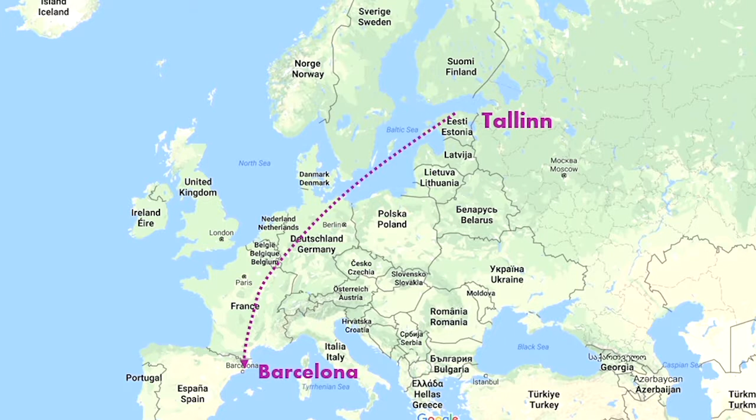So as said, I come from Tallinn, and almost 10 years ago, I studied 1 year in Barcelona. In Tallinn, I have a Master of Science degree in civil engineering, specializing in HVAC design. Though during those 5 to 6 years, I realized that design is not really what I would like to work with, so it's more energy.

Therefore, after 1 year in Barcelona, I went back to Tallinn, and then I went to Gothenburg. There I wrote my master's thesis in thermal energy storage in a company. I did an internship, and then I stayed. I learned Swedish, so now I work as a sustainable building consultant for 7 years.

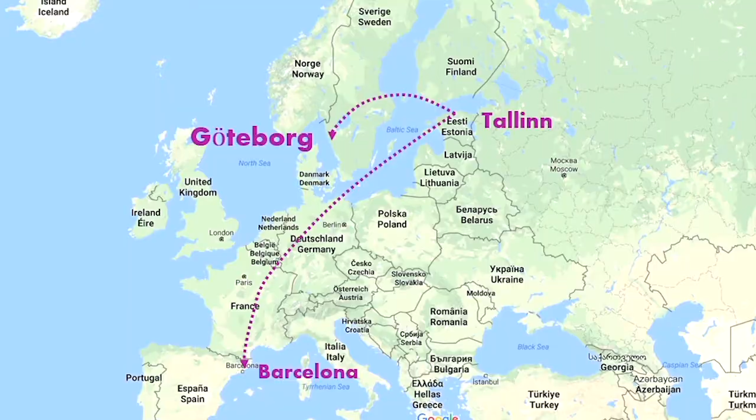5 years I have worked with simulations. A lot of simulations, mostly with IDA, as Alice will talk about later. A lot of daylight, indoor climate, energy, and so on. Yes, and there was the slide for that.

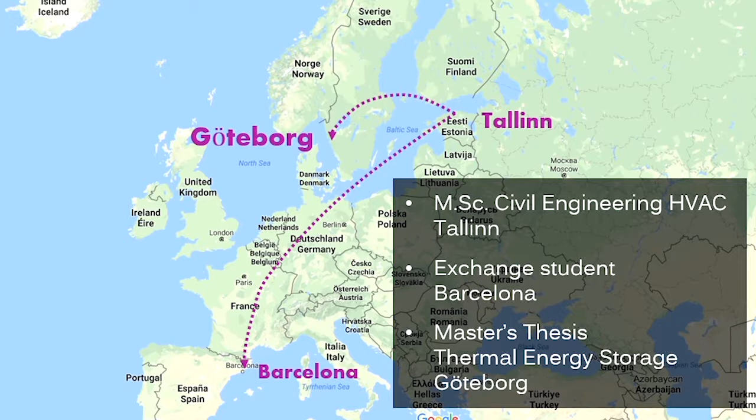Right now, for 5 years I worked in a company called Bengt Dahlgren. It's an HVAC design company, and today, for 2 years, I work in ÅF. And here, a bit of a presentation.

What's that? This is a Swedish Å, as you see there - it's an A with a ring, pronounced O, so ÅF. It's one of the biggest consultancy companies in Sweden. The sales are 11 billion Swedish krona. We are 9,000 people worldwide, and we have 100 offices.

And our new motto is making future.

The organization, just for you to understand the possibilities in the company, is divided into 4 divisions. We work with industry, so that's mechanical engineering, for example Volvo. Everybody knows Volvo, right? It comes from Gothenburg, actually. Did you know that? So that's mechanical engineering. Then we have infrastructure, where I work - all buildings, roads, bridges, and so on.

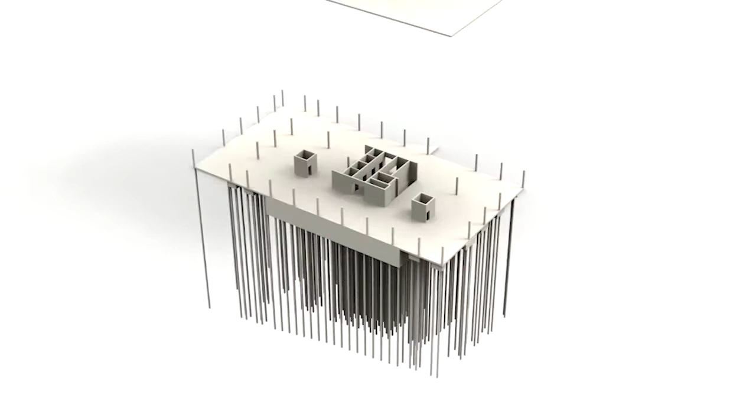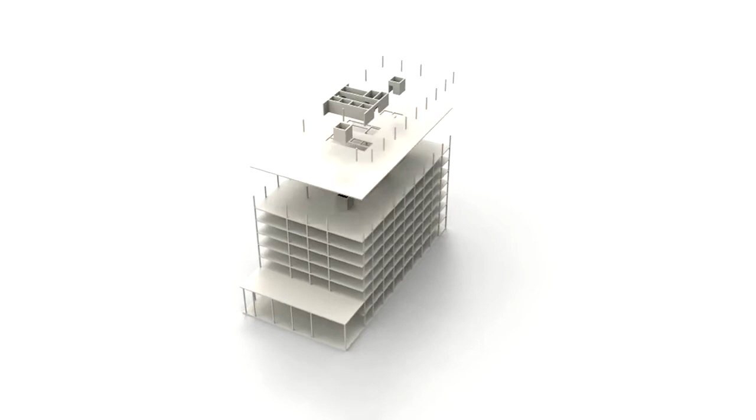Well, the sound is working good. This is buildings business area in Region West in Sweden. What kind of disciplines we have? This is our office building in Gothenburg.

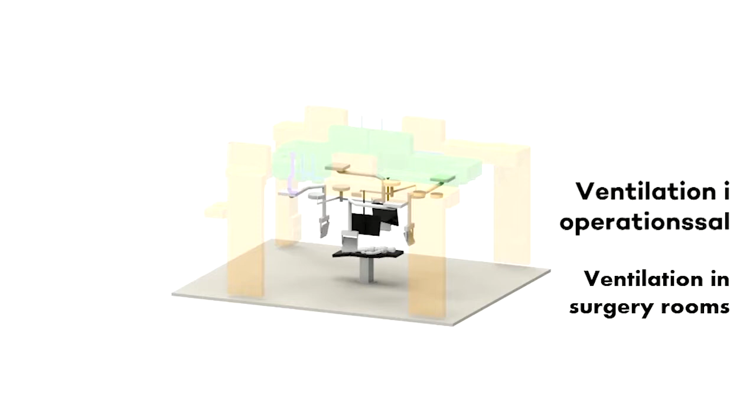Leading consultants in ventilation in surgery rooms. Does any of you work with that? As you noticed, there are a lot of ventilation channels and ducting in the walls.

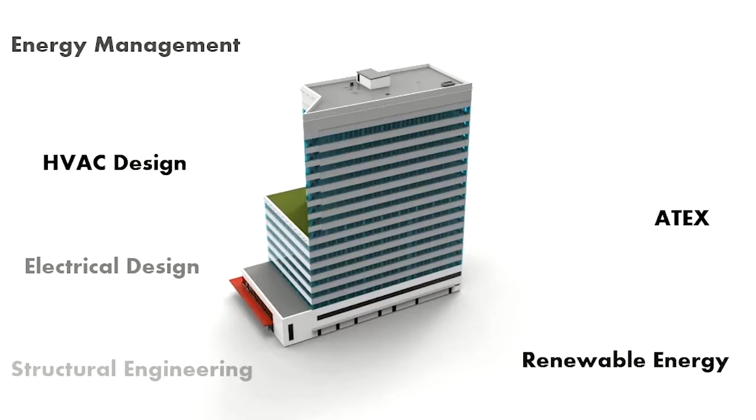And here is almost the last one, with no music. So this is all the disciplines we have in the office where I work. Of course, we work with all the other offices also, mostly in Sweden, because building design is a very local market, so it's not super international. So I work mostly in Gothenburg or in the Västra Götaland region.

What you notice maybe here, what is missing is the architect. Currently, we do have architects also in Stockholm. Let's see, in the future we might have them also in Gothenburg. That means that we can do the whole building design from one company. And that's something we're working on already. Some projects that we have, except the architect, in the region then.

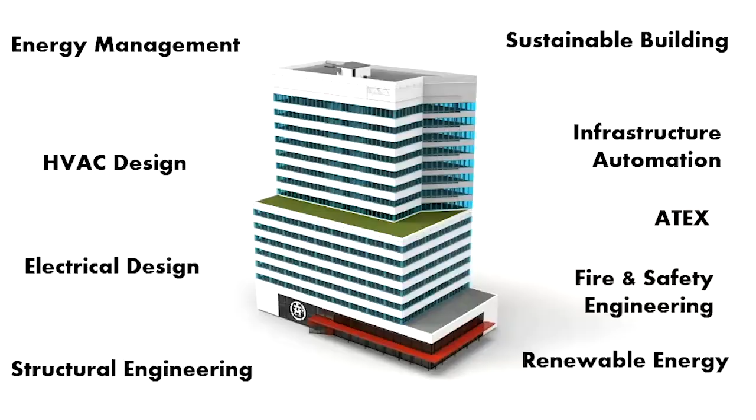And where I work, so now when you come to Gothenburg, you will recognize this building. You will know that is where I'm working. So today I'm working as a section manager or department manager for sustainable building. We are about 10 people working only with what I'm going to show you today.

Then also we have other colleagues in energy management that work with existing buildings, and so we have a lot of collaboration with them. And also we have an automation group that has energy focus and so on, and then the classical design principles, as I said. In sustainable building, we work almost only or mostly with new buildings. So also my presentation is about new buildings.

A lot of office buildings, hospitals, or commercial buildings. Some residential buildings also, because as you may have heard, in Sweden there is a big construction boom right now. We're building a lot. And also the reason is that there's a lack of residential buildings. So people have nowhere to live, basically. So that means there's a lot of jobs for us. So I'm going to show you some practical examples about sustainable building, what I mean with that.

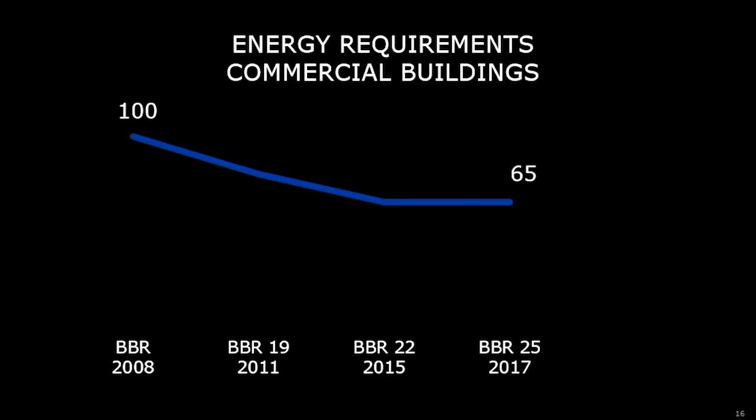And here, what are we talking about then? I have tried to illustrate it here. It is rather complicated because it's how we calculate, but just for you to get an idea of what numbers we are talking about. Because in the past half year, one year, we have got two new legislation versions. So they have changed everything. So in every project, the first question is not what building you're building, it's more like which legislation is applied to this project. Because then you know how to calculate it, or to work with the question.

What is BBR? It is Boverkets byggregler. That means the minimum requirements for how you build buildings. And their chapter 9 is for energy. These numbers here are in kilowatt hours per square meter per year. I haven't translated that. Square meter, how you say, heated floor area, as you know. Yeah, it's the same, more than 10 degrees.

Here is the version of the different legislations and when they came out. So basically, in 2008, you have achieved the requirements if you have maximum 100 kilowatt hours per square meter year.

But it's not total energy use, we are talking about the building's energy use, and this is where it becomes complicated. I'll try to make it short because Sweden is the only country that does this division. What I'm referring to is the energy used for heating, for the heat transmission loss you have with radiators, the energy used for cooling, for fans, for HVAC units - that's what you sum up, plus domestic hot water. Then it has to be maximum 100.

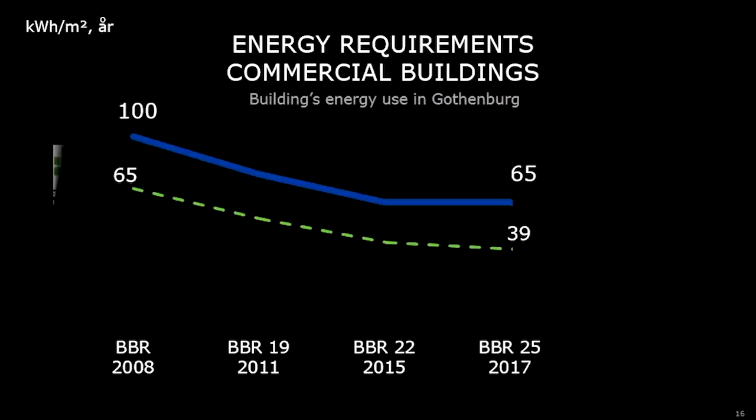This one, I will also mention this later on, but Miljöbyggnad is the environmental labeling system used in Sweden. Quite a simple system, but in order to have the highest level there, which is gold, you have to have 65% from the legislation's energy use. So there you see where it's needed to work even more with sustainable building.

And there is also a new version. So it's very confusing right now in the Swedish market because we have so many new versions at the same time with different projects. But yeah, that's why you need consultants to know about them.

And here, as you see, well, 2008, no problem - you can easily build a building with 65. But now, when you come to 2017, it's very low.

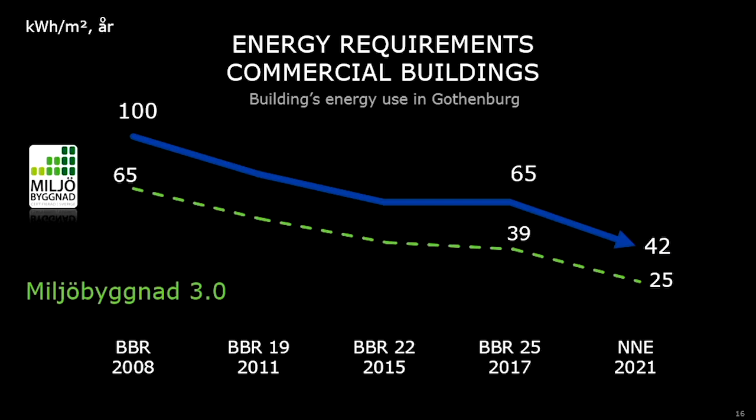And then in 2021, which is the nearly zero energy performance requirement you've heard about - no, this will be enforced in Sweden in 2021. Also a year when Gothenburg is celebrating 400 years, so if you want to come visit, there will be a lot happening. But the point here is that we are going to have even lower requirements.

So this is probably not the... I think that because in 2008 we talked about having lowered requirements from the legislation to have a green profile, but in 2021 I think everybody will work with this number, so there won't be any more requirement to achieve such low performance. But we don't know that yet, because it hasn't been enforced, because we're not there yet.

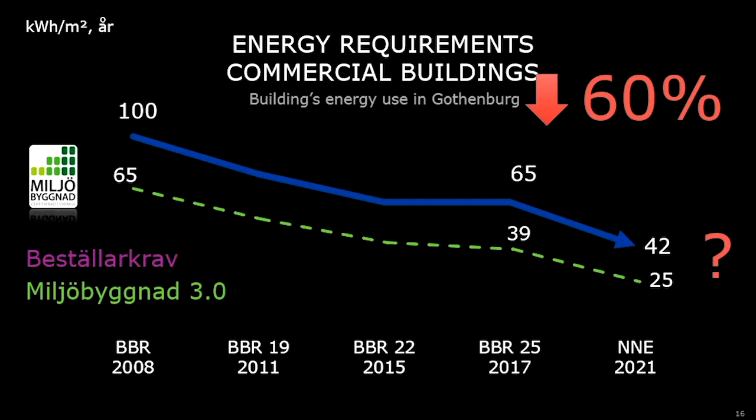This word here means the client's requirements, so the property owner's requirements, because in Sweden most of the biggest property owners have their own requirements for sustainable building, which is usually the same as the environmental labeling systems' requirements, or even tougher. So this was about the background. Any questions about this?

No? So 60% lower energy use - can you hear me? Because I think I'm doing this now. Yeah. So what does this mean in practice?

When I was preparing this presentation, I had a lot of pictures, and I was thinking, okay, but let's really talk in practice. So I chose one project that I'm working on right now, been working on it for 2 years, and just as an example, what we do there.

It's quite a special project because it's not every project - there's a lot of innovation there, the main focus. But it would still be a good example of what we can do.

Yes, this project is called Johanneberg Science Park 2. It's this one, the red building here. Why it's number 2? Because here we have number 1, Johanneberg Science Park 1. Johanneberg is an area in Gothenburg at the Chalmers University campus area.

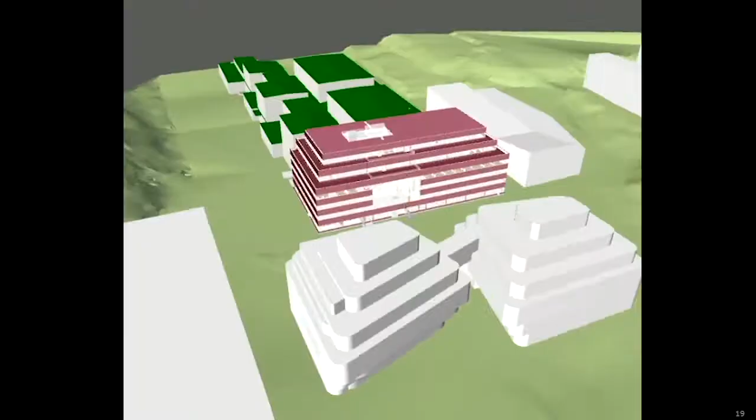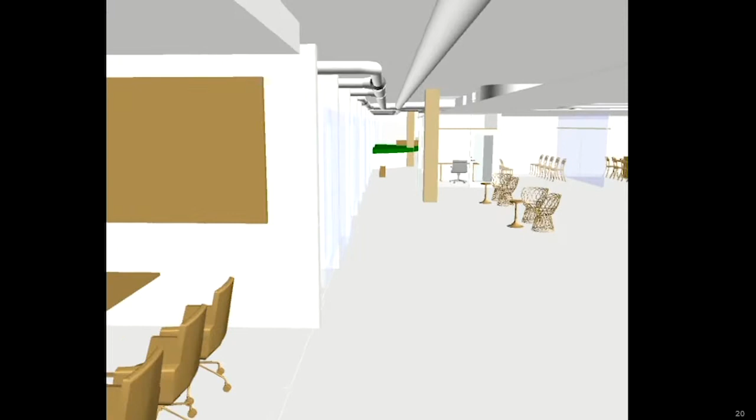Yeah? Oh, so I can take a break and show you some more videos. We were playing here just to visualize, because we are no architects, but to show the house. Okay, that was it. Some furniture. It's all about visualization right now. You have to show pictures.

For example, when you work with architects, you have to really show them. The text doesn't work. No one reads text anymore. So here we just try to show it, because we talk with our other colleagues in industry and in technology about this project and how could we do it in different ways. At ÅF, because we are the innovation partner, and they don't work with buildings, they don't know what I'm talking about. So you have to also show them, this is what we talk about.

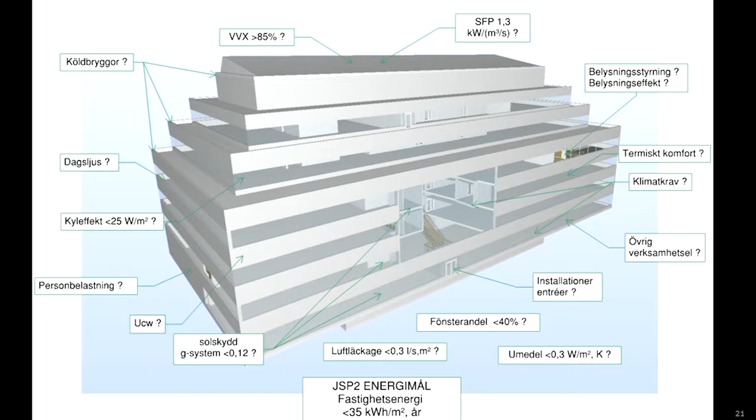Here we come to the most interesting part for you guys. This is the heat exchanger in the HVAC unit. So it has to be higher than 85% if it's rotating. That's also quite a normal requirement already. But it depends also how you then design the whole system. Because when we come to a specific fan power, 1.3, it's quite hard to achieve here. And that we haven't done for other reasons also.

But then all the time when we don't really achieve some requirements, then we have to motivate them. And it's all documented, and it was all signed by the property owner's technical group. So you can't really take your own decisions, we don't care, it didn't work. It's more, okay, did you really do everything you could to achieve that? Yes, we did, but since we have done these changes, we couldn't have exactly that number. But it will be good anyways. But still, to describe how the process works with the requirements.

I have more pictures on that building. Here I didn't mention this, but I will come back to that if we have time. It's for solar shading. Any questions so far on some numbers here? Yeah, I have a question. The U value 0.3, it's total for windows and the facade? Yes. It's total for the windows and the facade. So what is the U value for the windows? Do you know? Good question.

Yes, I know, because I work a lot with facades. So the U value for this project, including the frame, is 0.8. That means when we are building curtain wall profile, the glazing is 0.5. And that's super low. If you want to go lower than that, you have to change the argon to krypton, and that is not environmentally friendly. And the walls, thickness and the U value?

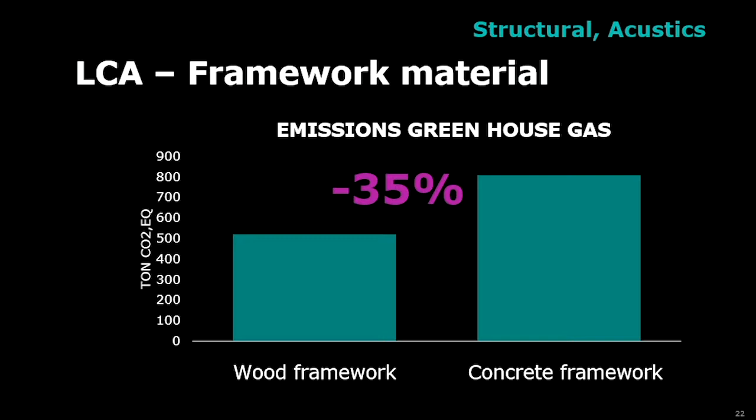Everybody's like, what? In wood? Are you kidding me? Office building? Why complicate your life? Well, because we are working with sustainable building. And that has also made new challenges for the structural engineer, for the acoustics engineer. And now we have also an innovation project in this project for acoustics, because it's much harder to achieve the acoustics requirements that we have from the environmental labeling system, which are higher than the legislation, between the floors and so on.

Because wood is a natural material, it moves and it's alive, let's say. But at the same time, it means that we learn new things and we find new technologies, which is quite amazing. But acoustics is not really my area. I work to make sure that we fulfill all the requirements.

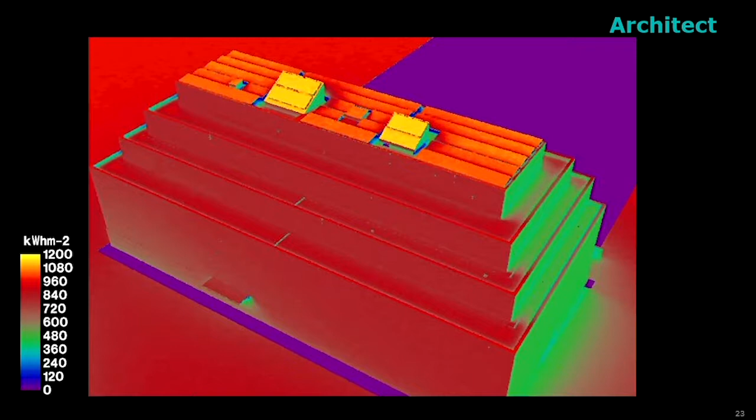This is quite a basic study for the solar radiation, kilowatt hours per square meter of outside surface per year. So just from the 3D model, take a picture and you see where they should put the solar cells. Here, of course, is the best, but the roof is quite good also. So we have solar cells on the roof, which is not really innovation. Most of the projects have that.

But we did also look into having them integrated into the facade, but that's not really cost effective because it doesn't give that much energy compared to the investment. And then, of course, you always work with the cost. We don't have an endless amount of money.

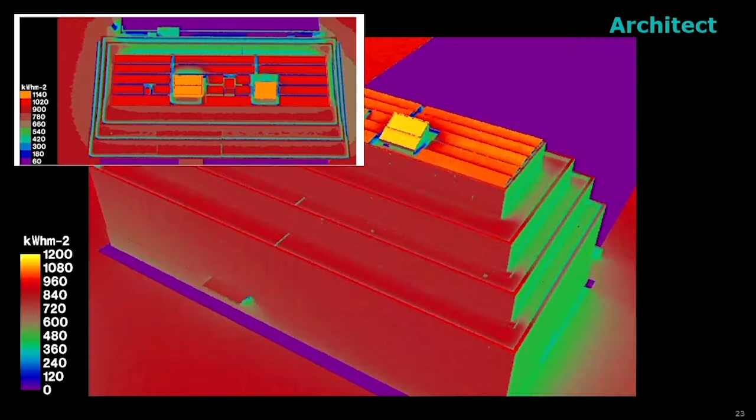And in this type of construction contract that we have, everybody is thinking about the cost. So you're open about the information with the property owner and the constructor. Like, okay, if we do this, can we minimize the cost? It's very interesting to work like that because normally, in the early stages of the design process, we don't talk so much about the cost of the actual systems that we build in.

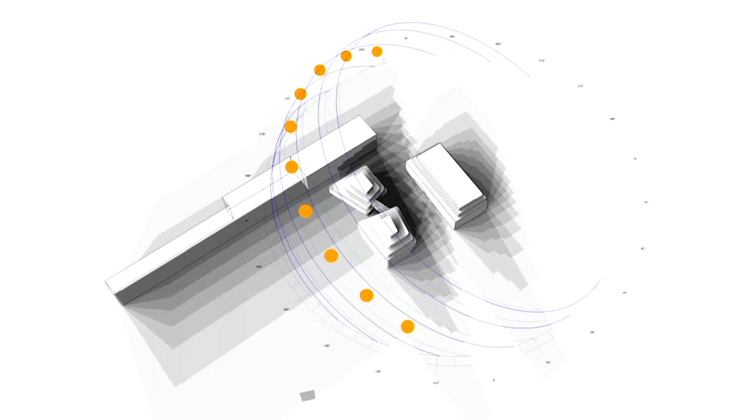Here we have looked at the shadows, just as an example, and we see the south facade doesn't have any shadow at all from the other building. Well, here those buildings were not in the model. That means that we will have a lot of daylight, but at the same time it will be very hot. And what do we do so that it wouldn't be hot? Here we didn't open any windows. The first picture was 36 degrees.

So this is a study. Normally it's like this, that you work with the question so you know the result. You say to the architect or to the client, we will have problems here. Then they're like, oh, are you sure? Okay, we can do a study about it. Just to prove what we have just said. So you do a study.

And I mentioned my colleagues in industry working with Volvo and vehicles; they do super amazing detailed CFD studies. This is very basic, but still quite hard for us to do, because we work with simulations of buildings, but not with that specific topic of how the air moves, what it depends on and why.

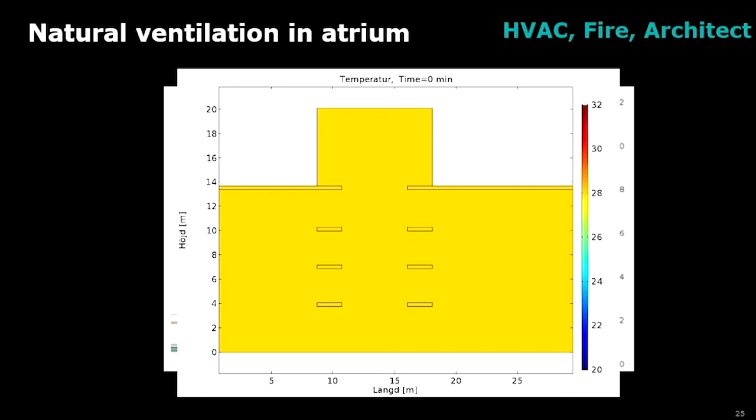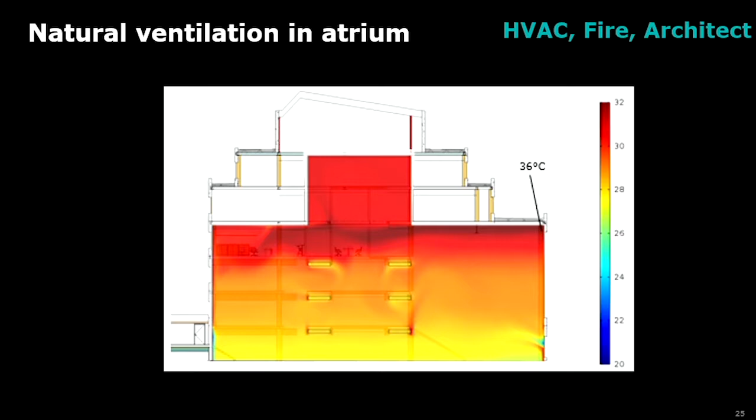So let me move back. The result here was that we will have 36 degrees here. The requirement is 25 degrees inside, maximum, for the cooling. The challenge here is that the atrium goes through 6 floors. This is the south facade, this is the north facade. In the beginning we had an atrium through the whole building, but no glass on the roof, glass only here. And then we checked that it will be very hot, so what do you do about it?

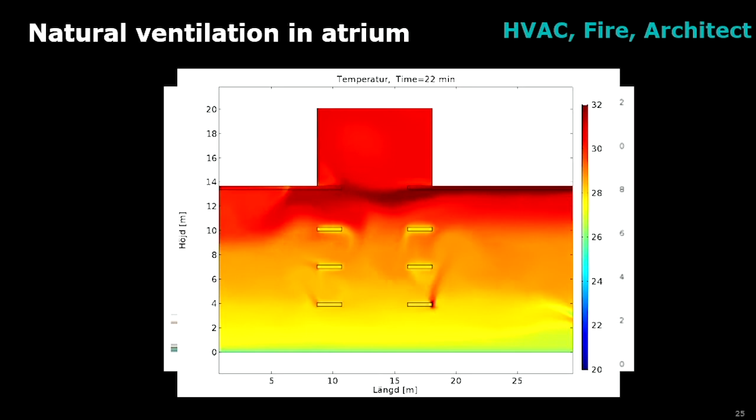Yeah, as you see in this picture. So these are the different floors, because people go here, they cross from one side to another. Then the project advances. We have new principles. We need to have more tenants, maybe. So we cut in half the atrium.

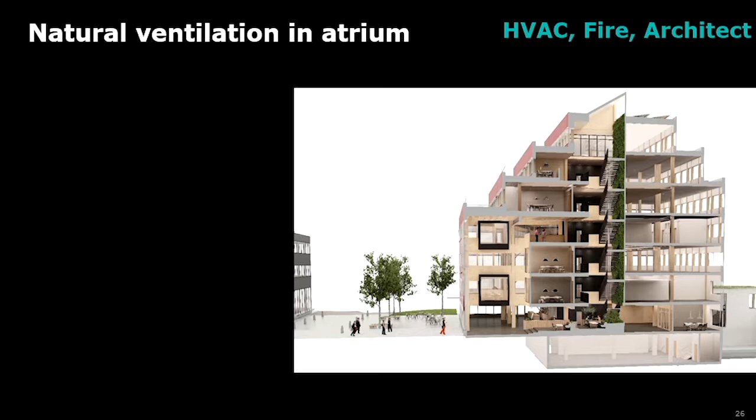It doesn't anymore go from south to north. Now it's flipped because this picture I couldn't print it. So anyway, it's from south to north. If it goes south to north, the heat comes in and then it goes out. No problem. And then we just checked that it wouldn't be too high velocity on the air with our basic simulations. And they cut it in half because here we will have more office space.

That means that all the heat that comes from exactly the same glazing area will now be in a much smaller space. We were like, okay, have you really thought this through? But we understand the reasons why we do that. So then we've done a similar calculation in another program, because we needed to. And this was the result: we will open here the facade, like windows or natural ventilation hatches here, and then up on the roof.

So just to ventilate it, because we can't put cooling beams there, because that will not go together with our energy performance requirements. And it's a combination of simulation to see how we think it works, but also a combination of experience, because with natural ventilation, I don't know how many of you work with that, today it's not so common, and I think there are not so many people who really know how it works, including me, but I have worked a lot with atriums.

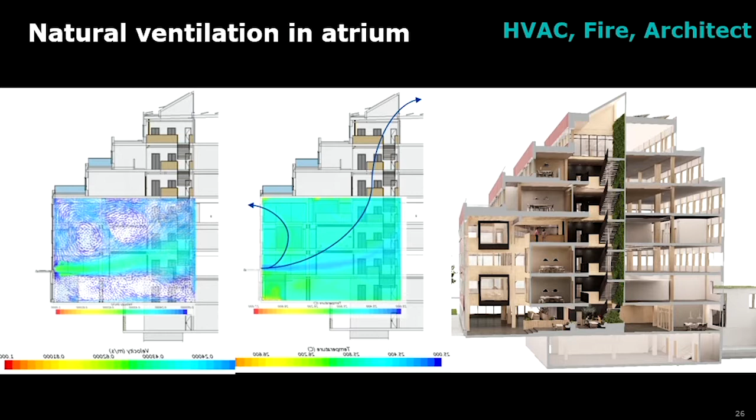So it's experience that you think this will work, and then you try to prove it with the simulation. But not only that, here we check the temperature and the velocity, and we saw that okay, we need to open it there also. We didn't want that if someone goes here, papers fly away. Well, I don't think that would happen, but still, to double check that.

But you can't just open windows and think everything will work. That's something I say to the architect now, because they don't like it: if you open the windows, you have more frame area and the aesthetics will be different. But here we have good architects and they understand that we need to do that. But it's not only about opening windows, it's a combination of many other aspects.

So here we have the solar shading solutions. In this project, we have MicroShade in the atrium facade. It's a 140 square meter atrium. MicroShade is a micro lamella developed in Denmark. Someone has maybe heard of it? No? It's a very small company, from the university, that has developed this kind of solar shading. It's quite complicated to calculate, so that's why it's complicated to apply in projects.

But since we think that we know everything, we say, yeah, this will work, this is the best solution. Why we chose that? Because it's a passive solution. It doesn't go up and down. It's in the atrium, and in the atrium you actually want daylight. So this is something you can still see through, compared to, for example, screen print, or something fixed on the facade, which wasn't an option for this project. The G value for that is very low.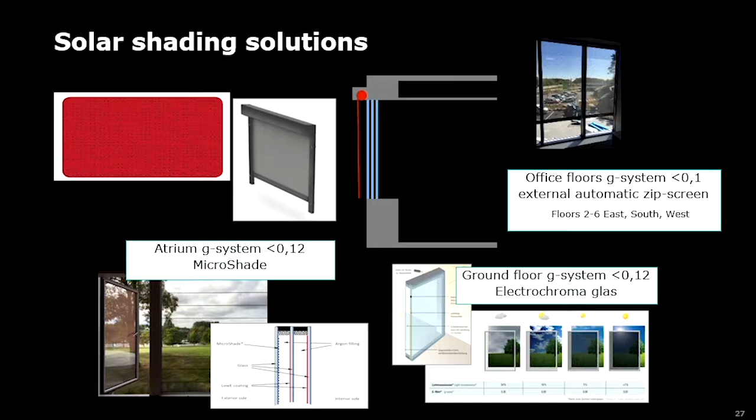It's the same, you skip that. We have done daylight analysis, so there will be an open office there, open landscape to call it, and here we just check the whole floor without any furniture.

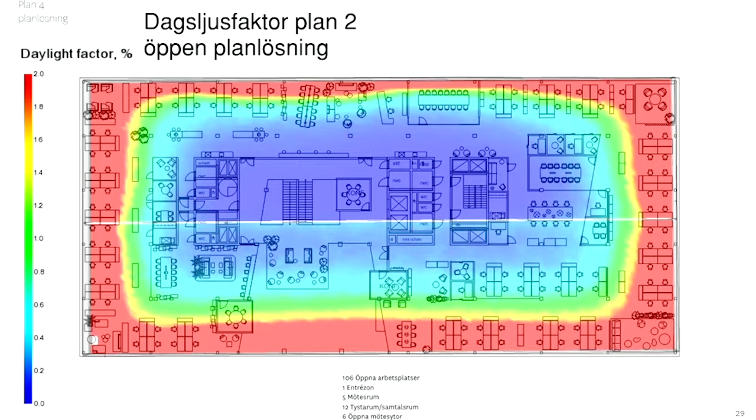It's quite simple in this project because you have the same window ribbon, so it's the same design principle or dimensions for the whole building. And then here we show, yes, here you can't really have offices that people work in because it's too dark, because you don't fulfill the requirements. As you see here, you have to have a daylight factor of 1.2% to get gold.

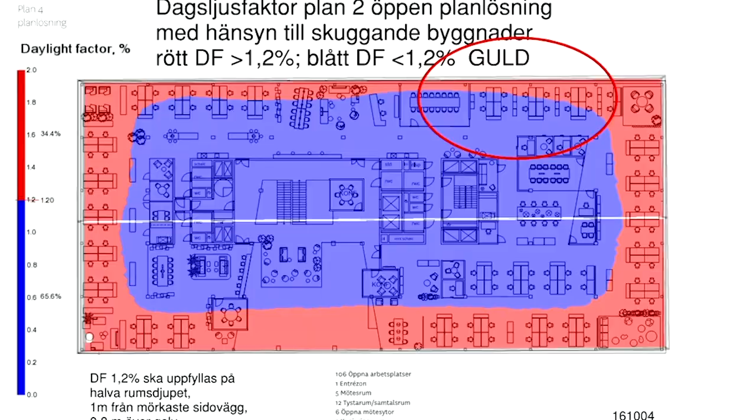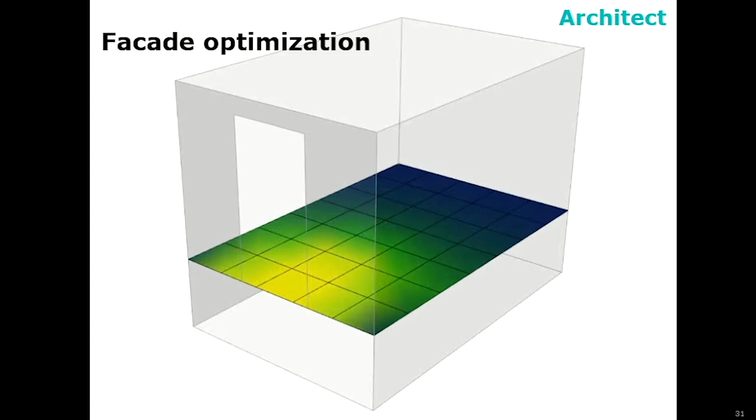I will not go more into detail time-wise on this, but we work with daylight. That's the point. A lot of different kinds of simulation programs to analyze the building. For example, this one is facade optimization. So as I mentioned, this is a regular office, 2.4 meters, 3.6 meters, single person office, cellkontor we call it in Sweden. And then you put here like, okay, I have to achieve daylight at 800 millimeters from the floor level. And I have to achieve that I don't have too much solar heat with that kind of glazing. And then it works, you push play and it calculates, this is how it will look.

So this is something we're working on to work more with architects in early stages, instead of doing like 100 different simulations back and forth, because daylight and solar heat calculation is not the same. Well, now it's the same program, but it's not really the same methodology or the same parameters, so you really need to remodel the model and then calculate it. So here it does this very fast in this program, but it's not as easy as it looks here. It takes some time to figure out.

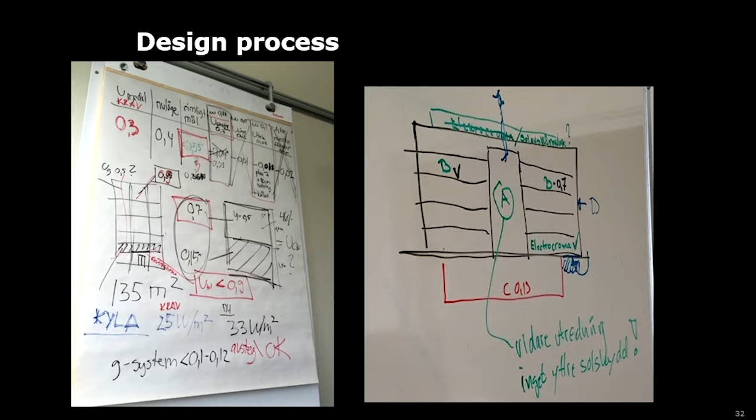This is an illustration of how we have in the project been talking about U values. Just a lot of brainstorming, sitting down, okay, now we have to do this with all the project group. And then we decide, okay, here we will have microshade, there we have zip screen, and here you see the glazing is 0.5, and then it's 0.7 for the total. So that's how we achieve it.

And this is a meeting that I'm leading with the project group because they really need to understand what we're doing. It's not only sending an email or giving them a document, like this is the number and do it. It's really that they will understand why they have to do it. So that's a challenge, but it's also what's fun about the work.

Time-wise, so conclusion on this project: we have variable air volume. Everybody was wondering that, for sure. I'm talking about daylight, but you were like, no, what's the HVAC system? So variable air volume with climate simulations we have done, indoor climate, I mean. Natural ventilation in the atrium, I call it. Then we have lighting with low installed power. Electrical engineering is quite simple when it comes to the sustainable building, it's more like when they measure the stuff that they do it very complicated. Lighting with daylight control, of course, because we have a lot of windows, so we should definitely have that control.

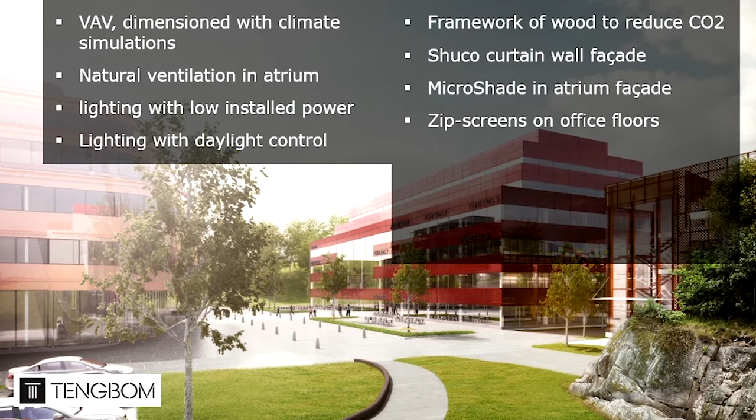Framework of wood to reduce CO2 that I mentioned before. Shuco curtain wall facade, microshade here in the atrium, zip screens on all these floors here. Electrochroma, well, that's not anymore, but we wanted to try different facades here. But due to cost and so on, we don't have it anymore. Window design for daylight, because it's the ribbon and also the height. At the last minute, we actually decreased the window size because we had problems fulfilling the U values. So the architect was not so happy, but they got something else, like they want to have a green roof. We will see if that will happen, but yeah, it's give and take.

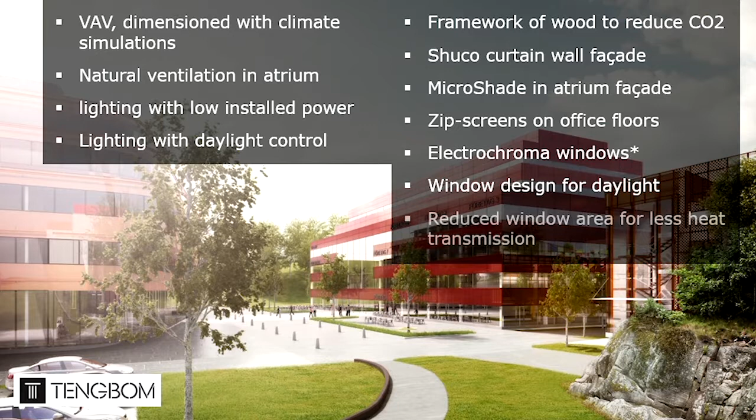Yeah, as I said, solar cells on the roof with batteries. Very shortly, yes, we will have - not Tesla batteries - but we will have batteries in this building for demand and production, to have them simultaneous. So it's another innovation project here, and that hasn't really been done so much in buildings, so we will see how it works.

Then also we have DC, direct current. So not AC, DC from the solar cells, because solar cells have DC, and we're not having the exchanger in between where you have losses. Then we want to have DC, for example, for the HVAC, for the fan. And then we have to call everyone: okay, do you have a fan that you will sign the warranty that it will work? So it's a lot to explain what we are trying to do here, which you normally don't do the same way. So it's another innovation project here.

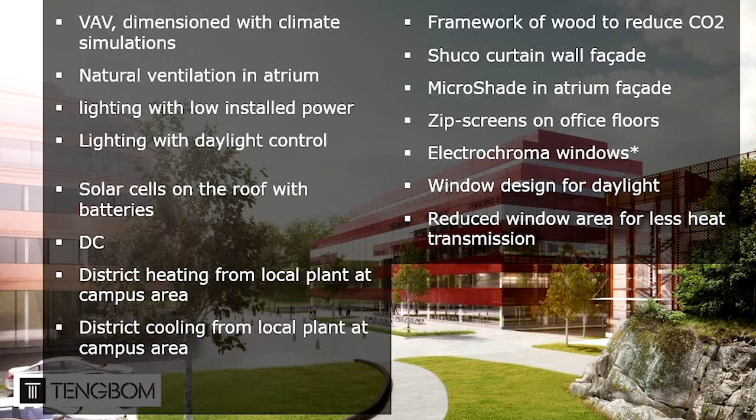But otherwise, in this campus here, they have their own district heating, the local plant, and then we have district cooling, because I thought you would want to know how we otherwise have the building. Because we didn't have enough space to have geothermal boreholes, for example. But we had that option also from the beginning. This other building has that. It has, say, 200 meters down boreholes, heat pumps.

And then, also very shortly, PCM energy stores, another innovation project that I'm very happy for, because this is my master's thesis. PCM is phase change materials, so salts or paraffins, that you can store the thermal energy in, and then you can reduce, in this case, cooling power when you have the peaks. We can talk more about that later. So as said, we have high energy performance requirements, high ambitions for sustainability, and we have Miljöbyggnad Gold.

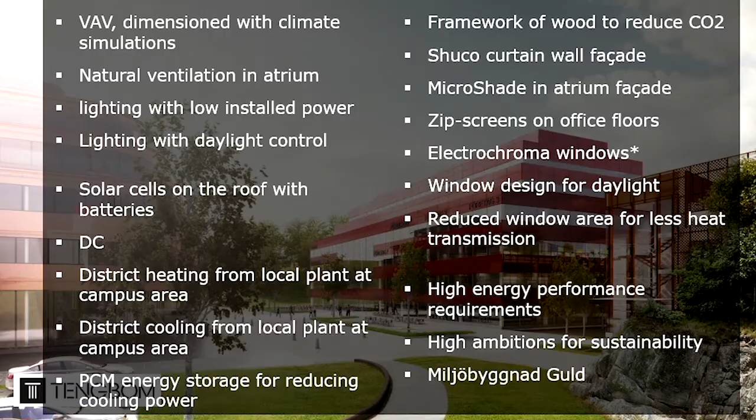Yes, I was just thinking, I will try to, because I have 5 minutes for me and 10 questions. Oh.

Then we have Living Building Challenge. That's the Canadian version, but we don't use that so much. There's a new one also called WELL, that is only for the indoor climate, that you work with together with LEED. So it's more like the soft parameters, like how do you feel in the building. But since we work so much with those labeling systems, it's already next level that you are thinking of an even broader perspective. So there's also City Lab, that is for the whole city area, or many buildings together, like how do you design them? And these are maintained or managed by Sweden Green Building Council.

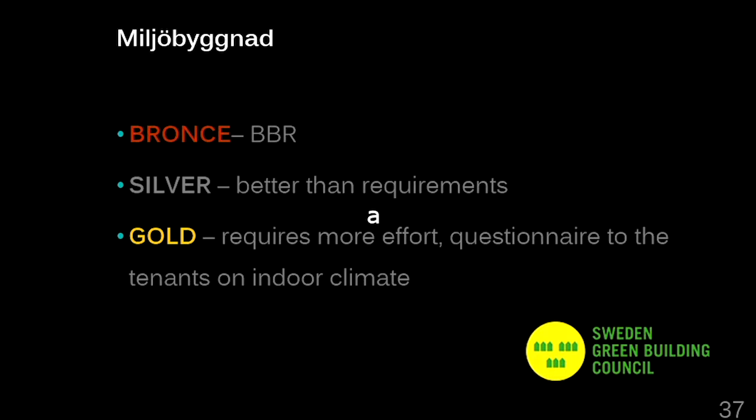Why do you work with the system then? In some projects you still want to do the quality check, because there's a third-party control of all the paperwork. So that's what I do: gather all this paperwork for all the different calculations or acoustics showing that we have fulfilled the requirements, and send them in. They will be controlled by a third party, and then you get the certification. Because for the legislation, no one will check that you actually did the job. Now we have the requirement of verification of the energy performance, but in my experience, no one from the government side has asked me whether I really fulfilled them.

Then we have silver, that is a bit better than bronze, and then we have gold, that requires more effort. And also in the end, you ask the tenants, do you like the indoor climate? Do you like the acoustics? And if they don't like it, then you don't get gold. So that's a bit why you work with that the whole project. Miljöbyggnad is divided in 3 different areas: energy, climate, and materials. Materials is like how you build the building, that it doesn't have chemicals that are not good for the environment.

So this is very short, because I want to come to this, because everybody is definitely wondering how we do this. I show you a lot of practical examples of how we work with sustainable building, but how do you actually make sure that you fulfill the requirements? How?

Yes, you hire me. No. Well, yes.

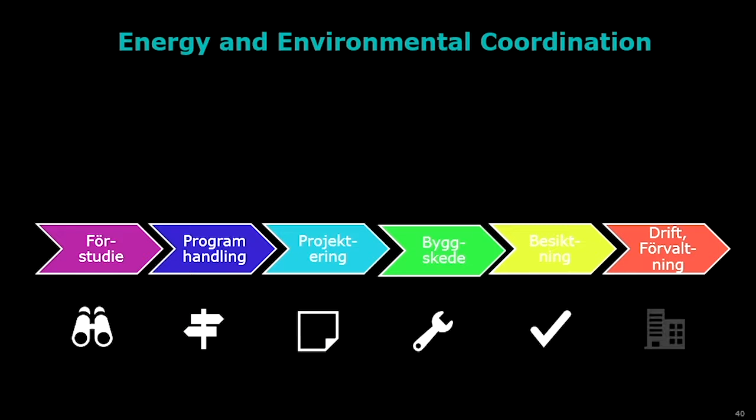So it's what I call energy environmental coordination. A bit lost in translation, this word, because I don't really like that term. This is not really coordination, because you're still like a project manager for energy and environment, but at the same time you collaborate and coordinate with the people.

This is the building process. So it's early stage study, where will you build and what will you build. Then you determine the house or building will have so many square meters, and the documents will be quite rough, but still you know approximately how much it costs.

Then mostly here comes the HVAC design and the electrical design, where you do the design documents. Then you build it to production. Then you check that you built as you were supposed to and everything works. And then you have the maintenance stage here.

This picture illustrates that in order to achieve a sustainable building - energy, environment, and certification - you need to work from the early stage until the end. The difference here with other consultants is that we actually stay involved still 2 years after the building is done to verify everything. So we really work from the beginning to the end.

I mentioned this project, Johanneberg Science Park 2. I worked with that 2 years, and I'm probably going to work 2 more years with that project. Then there's another project I worked on since 2011, when I started working. It's a really long process, and for that other project I will work 2 more years also.

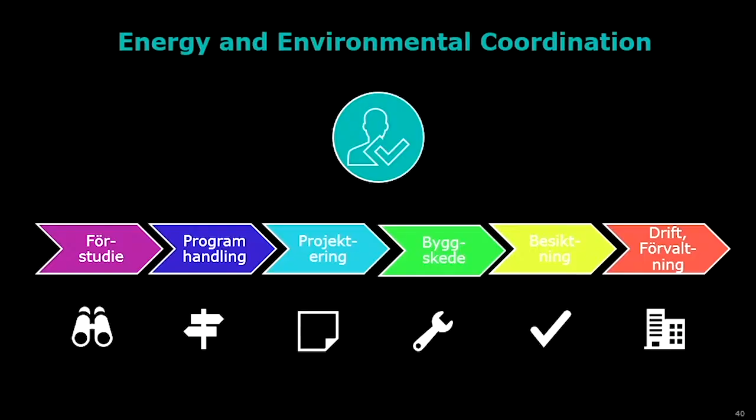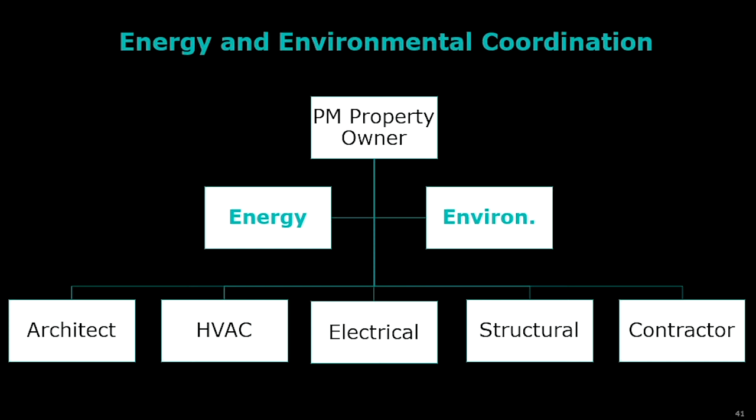The reason is that here I do the requirements. I can't just be doing the calculation, saying, yeah, you build a house like this, I calculate and say you don't fulfill it - point, you don't do more. But here you say, okay, this is the requirement, this is how we have to change it. You have to change the building. It's not only that you don't fulfill it, but how you fulfill it. Any questions on that?

Yes, I think I'm done now. So just final words - the most important thing about my presentation is to understand that sustainable building means we need to work together with all the disciplines to really be able to achieve the requirements. This is also legislation now, it's not a choice anymore, and you need to work in a different way - you need to be more open-minded. Thank you.